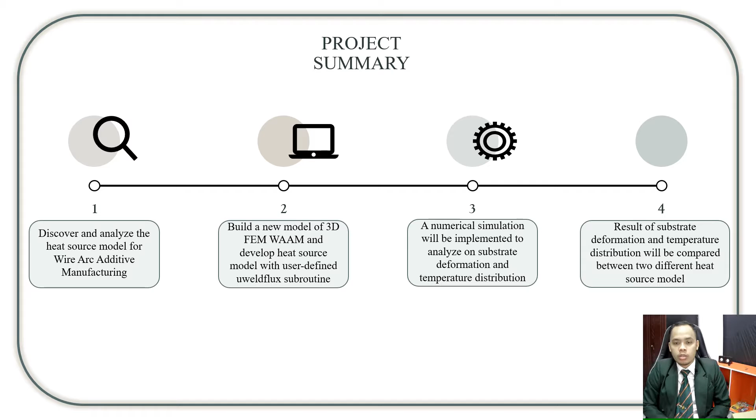Introduction of the project. Additive manufacturing (AM) is a technique by which free-form structures are created in a layer by layer fashion by building up content. One process of AM is wire arc additive manufacturing, which has the ability to produce and manufacture large custom-made metal workpieces with high efficiency among different AM processes.

For this process, the related thermal analysis starts with the solution of heat source, a suitable form and distribution of heat strength, the metallurgical microstructure, chemical modification of the material, residual stress, hardness distribution, thermal cracking, thermal shrinkage, and heat affected zone (HAZ), which will be affected by the distribution of temperature and cooling rate near the surface.

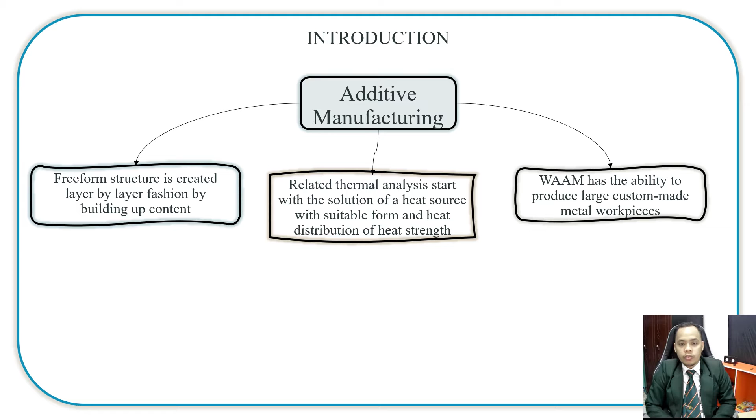Literature review. There are three sections in this literature review, which is wire arc additive manufacturing, finite element method, and AISI 316 stainless steel.

Wire arc additive manufacturing. Over the years, in the manufacturing industry, additive manufacturing became one of the huge and extensive innovations in the production of metal parts. Additive manufacturing is a method of joining material to create components from 3D model data, typically layer by layer, which has seen substantial rise in research and development since its arrival in the manufacturing sector.

The technology has the capability and potential to lessen the cost by reducing the wastage of material and time to market. Wire arc additive manufacturing is one of the most effective AM processes and a promising alternative to conventional subtractive manufacturing, with a higher buy-to-fly ratio, and it enables creativity in designing freedom and reduces the limit for manufacturing of complex assemblies formerly made of numerous subcomponents.

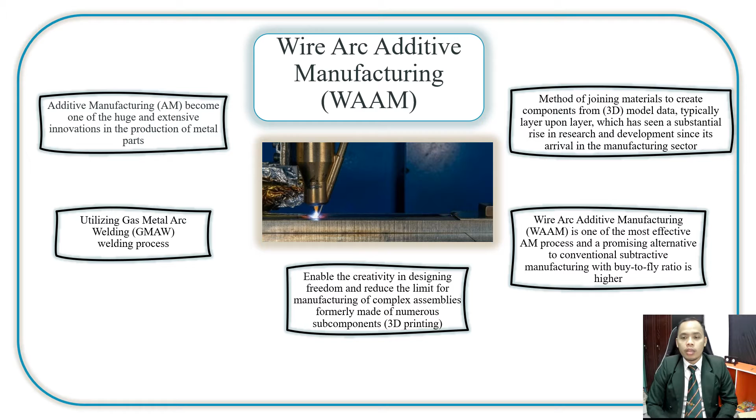The process of WAAM will utilize gas metal arc welding process, where the wire is melted by an electric arc plasma heat supply. Finite element method.

In the 1950s, engineers, especially in the aerospace field, began to use finite element method (FEM) more commonly. Only a few exclusive groups could access the technology, as modern computers were not commonplace and were very expensive. The utilization of FEM in manufacturing processes is now well known.

It is increasingly used in development processes and is part of the area of emerging application for computational mechanics. The industrial need to improve the quality and efficiency of products and to have a good understanding of the effect of various process parameters is the most important reason for this growth.

Model phenomena play an important role in the manufacture of steel products at different levels such as heat treatment, welding, and casting. MSC Marc is an advanced software for non-linear finite element analysis, has a good structure for research capability, and can accommodate a range of linear and non-linear structural analysis. This software will be used in this research.

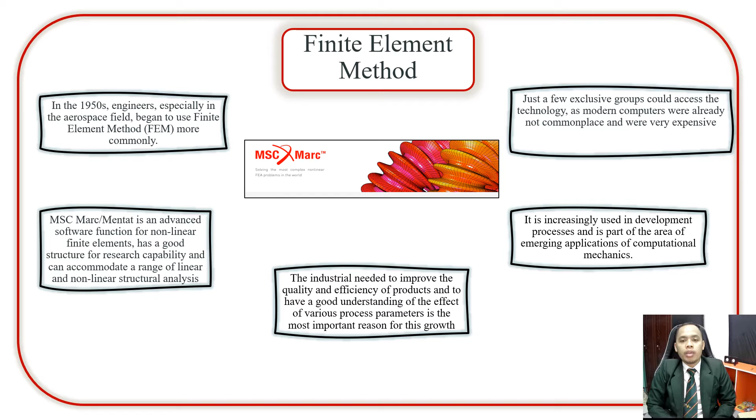Stainless steel. WAAM can generate parts in a shorter time frame. As an effective tool, this system uses an electrical arc to melt filler wire and can achieve a broad feed rate. Due to their superior performance and economic expense, stainless steels are commonly recognized as a significant class of alloy.

Stainless steel alloys have a chromium content of at least 11%, and the presence of chromium essentially prevents the production of rust.

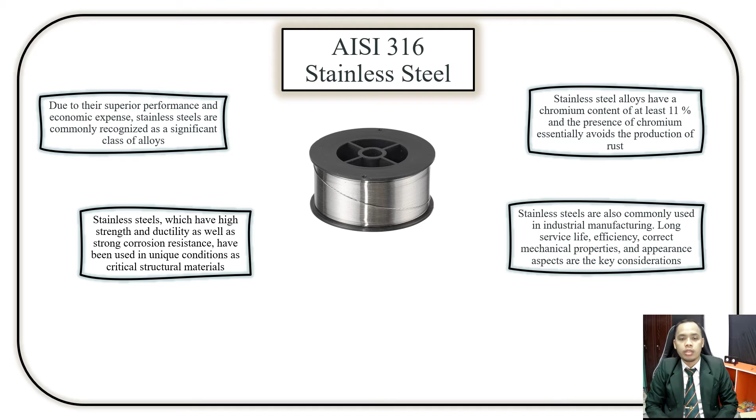Stainless steel are also commonly used in industrial manufacturing. Long service life, efficiency, correct mechanical properties, and the appearance aspect are key considerations. Stainless steel, which has high strength, ductility, and strong corrosion resistance, has been used in unique conditions as a critical structural material.

Problem statement: In WAAM, the design consists of a sequence of single-welded structures, one on the most, rotating cooling periods with deposition measures. The problem statement is how effective the recommended modeling is, and how simulation using the finite element method can offer an efficient way to research modification for this issue.

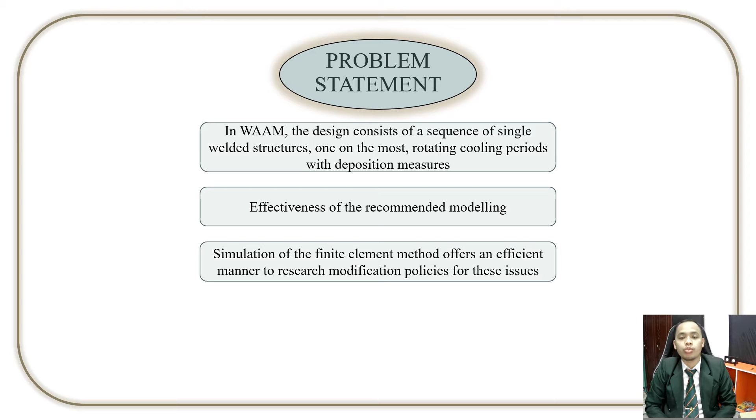The objectives of this research are to determine the parameters of the wire arc additive manufacturing model using 316 stainless steel, to generate a simulation model using MSC Marc as FEM software for comparing two different heat sources, and to characterize the substrate deformation and temperature distribution induced by the WAAM process using these two different heat sources.

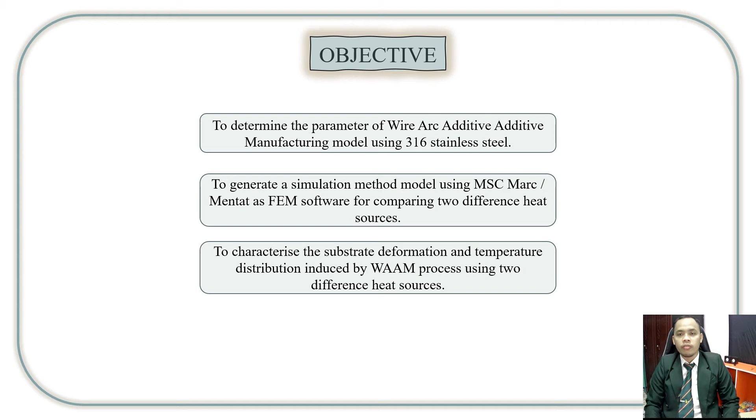Scope and limitation of the project: first, this project will focus on substrate deformation and thermal distribution. Next, simulation analysis will be performed using MSC Marc. Last, the results of substrate deformation and temperature distribution will be compared between two different heat source models.

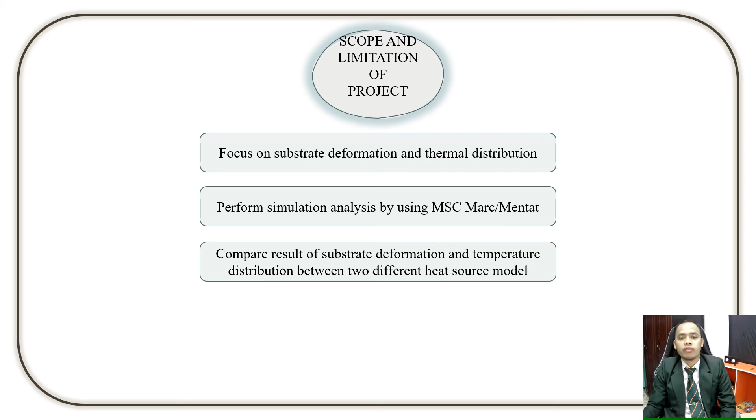Next, a literature review will be formed based on related topics of wire arc additive manufacturing. Then, determine the important parameters of the heat source model relevant to the research, and build the heat source model using MSC Marc software.

Then the simulation will be run, followed by comparing the data of the heat source models. Finally, prepare the results, discussion, and conclusion of the research, and the project will end.

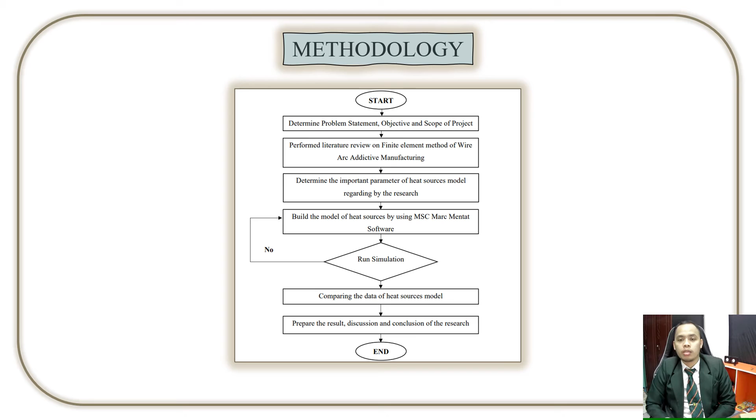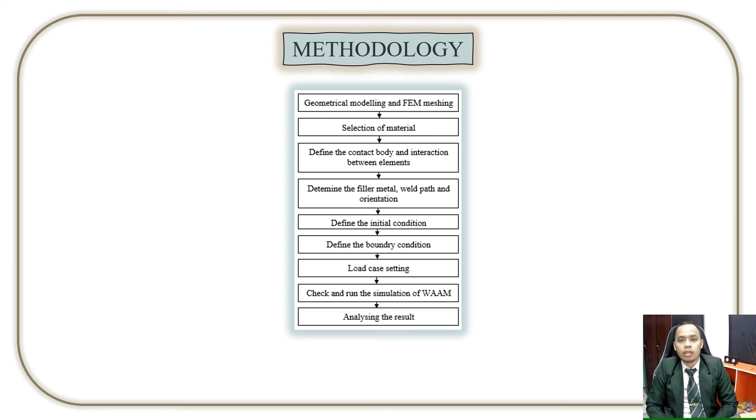Next, determine the filler metal path and orientation, then define the initial and boundary conditions. Next, the load case setting, then check and run the WAAM simulation. The last step is analyzing the results.

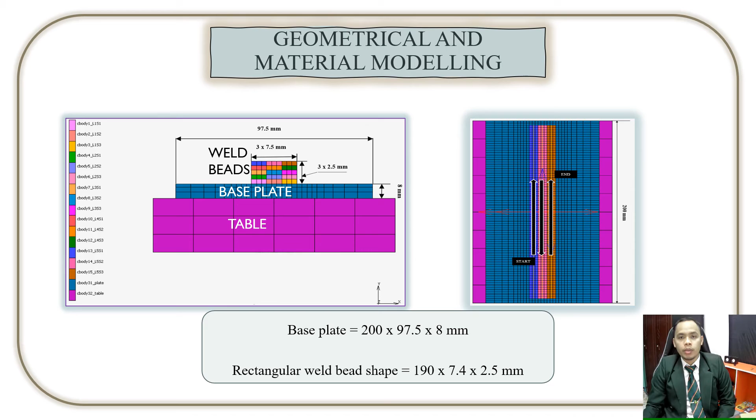The boundary study is split into thermal and structural analysis in the simulation. In every section of the boundary condition, on both the solid model and the shell model, the thermomechanical parameters are defined. The boundary condition of the heat source model is set when assigning volume heat flux in the thermal-structural analysis.

The double ellipsoid by Goldak and the rectangular heat source model were chosen as the heat sources for this simulation. The double ellipsoid heat source model has two elliptical regions in the heat stream, one in front of the arc and one in the rear, and is commonly used in the GMAW welding process.

The geometrical parameters A, B, and C of the double ellipsoid heat source model are independent values that can be changed for the rear and front quadrants.

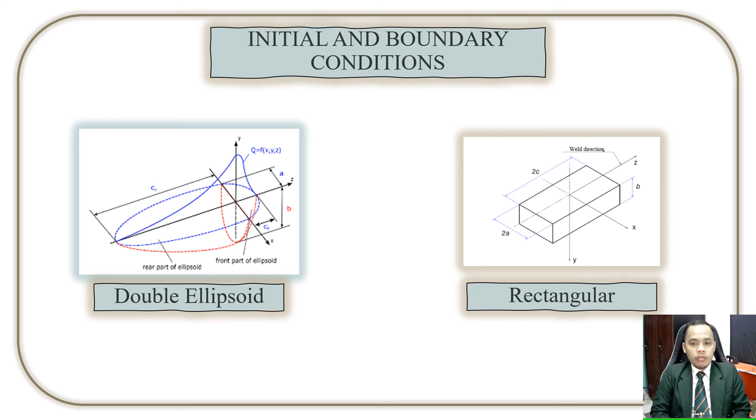For the rectangular heat source model, a user-defined weld flux subroutine, which had been modified, will be applied in the MSC Marc code with a uniform distribution of heat intensity for the various heat sources.

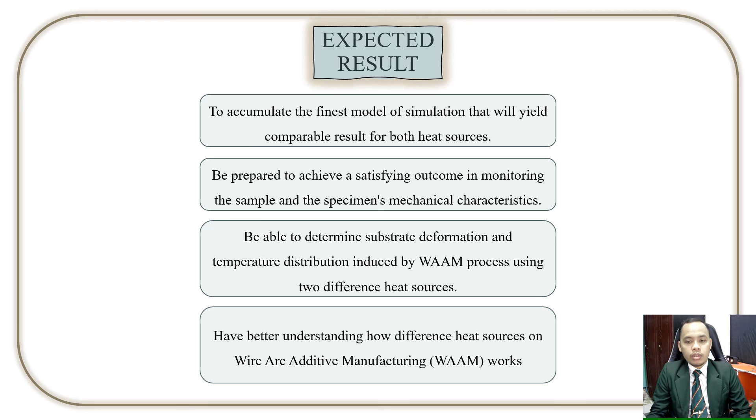Expected results: first, to accumulate the finest simulation model that will yield comparable results for both heat sources. Be prepared to achieve a satisfying outcome in monitoring the sample and specimen mechanical characteristics. Next, be able to determine substrate deformation and temperature distribution induced by the WAAM process using two different heat sources. Lastly, gain a better understanding of how different heat source models affect wire arc additive manufacturing.

This video will show how the numerical simulation works on this model.